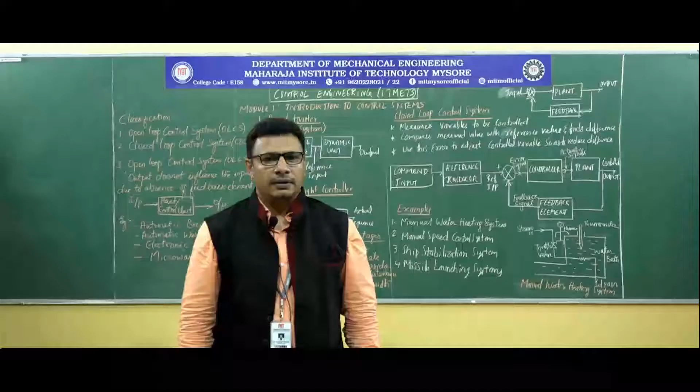In the previous session, we went through the overview of the subject as per the curriculum given by the university, that is Visvesvaraya Technological University, and we went on to know what are the possible outcomes the learner of this subject is going to attain, and along with that, we had an elaborate introduction to this particular subject. And then we went on to know the definition also.

If you can recall the definition for control engineering that I mentioned the other day, it was the arrangement of physical elements to direct, to regulate, to command itself and any other system in order to obtain the desired output. That is where we stopped the previous session. Now, the control systems can be of two major types. Either they could be manual control systems or they could be automatic control systems.

Now, in the manual control system, the job of controlling the performance or the functionality of the system elements is being taken care by a human. That is where we call it as manual control system. Whereas in an automatic control system, the human intelligence would have been transformed to some device which acts as good as a human intelligence to control the system. That means the human element will not be involved in controlling the functionality or the performance of the system. That is what is going to be the automatic control system.

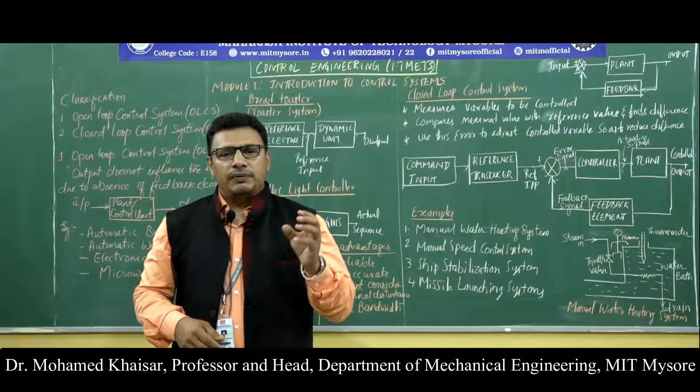So once the input is given to the system, that's it. It is the end of playing with the input. Then input gets processed by the dynamic unit or the various components of the system and we get the output. Whether we are getting the desirable output or not, that is of no relevance to the input. That means, by definition, the output of an open loop control system will not have any influence on the input of the system. That is what is illustrated.

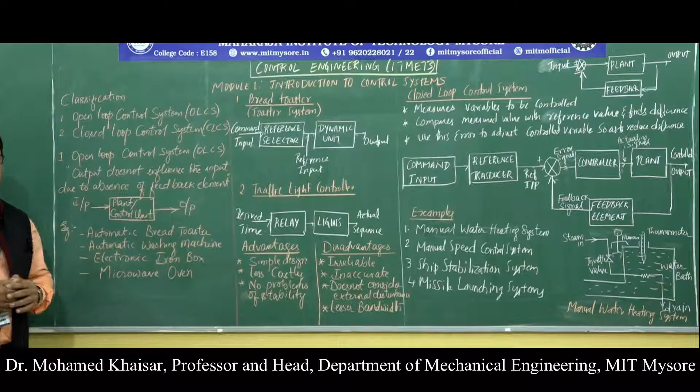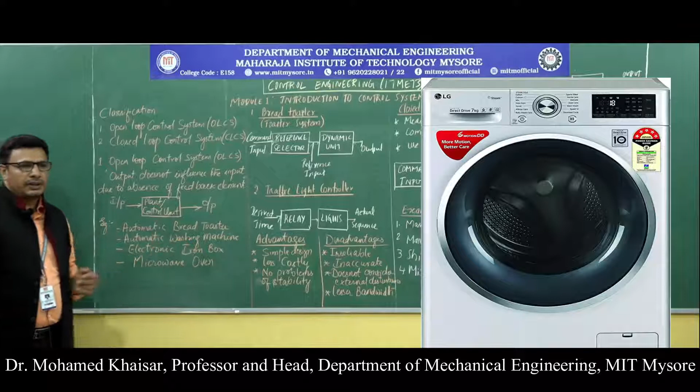Now, the most commonly used examples for open loop control systems are appliances most of us in our daily lives would have experienced, the list of appliances I have mentioned now. Automatic bread toaster, very commonly seen and used. Automatic washing machine, very commonly used. Electronic iron box, very commonly used as a household appliance.

Then microwave oven. In the modern lifestyle, all these appliances have become a need for all of us in society. Now, how do we say they are all open loop control systems? All of us have experienced the working of the bread toaster. If you haven't, let me just explain it to you. What do we do with the bread toaster? We toast the bread and eat. That is for a common man.

But let me think from the professional perspective, from the engineer's point of view. What do we do with the bread toaster? We keep the slices of bread in the toasting unit. Then what do we do? We switch on the electrical supply to the bread toaster. Then in the timer, we set the time, how long the toasting unit has to toast the bread, isn't it?

Then on what basis do we do it? On what basis do we do it? Because let me just tell you one reality. When do we call a bread to be a toasted bread? What is the desirable output from the bread toaster?

So by our own experience, what we tend to say is a bread toast is meant to be toasted when we find the desired degree of darkness on the bread toast. We try to visually measure the toasting of the bread by looking at the degree of darkness on it.

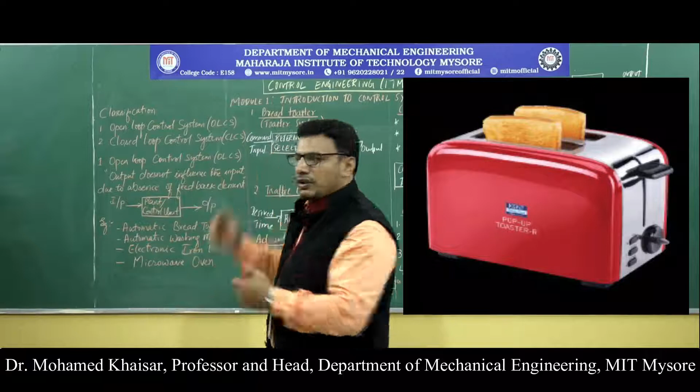Then the toasting unit is going to toast the bread and the result is the output. What is the output? The actual toasted bread. On the actually toasted bread, we are going to measure the degree of darkness. Now, let me just put the concepts of open loop control system here on the functionality of the bread toaster. Then from the toasting of the bread with the bread toaster, what all possible outcomes are there?

Number one, the bread, in spite of setting the calculated time for toasting, may remain under toasted. There may be a problem with the toasting unit, or you may have set insufficient time in the timer. Both are possible. Now, three possibilities are there as the output. One, the bread may remain under toasted. The bread may be amply toasted, as good as you want. You may find exactly the desired degree of darkness on the bread. Or it may also so happen that the bread may have got over toasted.

Now, if the bread is being toasted amply, as much as you want, then you will keep it happily and you will appreciate the working of the bread toaster. Now, you would have set the timer as recommended by the manufacturer, or as you have experienced on previous occasions. But in case the bread remains under toasted, does the degree of darkness get measured on its own, and does it tell the timer automatically to toast the bread for a little more duration? Does it happen? No.

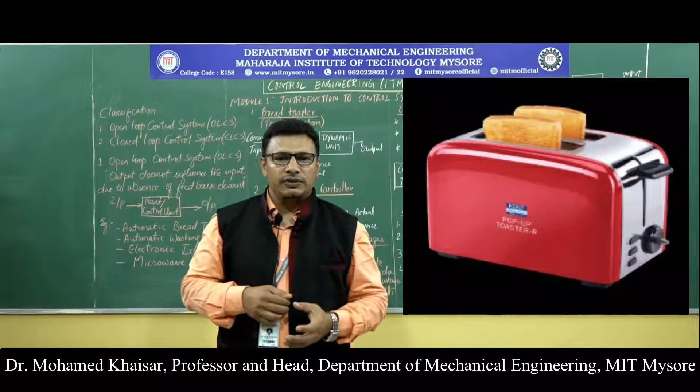Since there is no mechanism wherein the condition of the toasted bread is fed to the timer to alter the duration of toasting on its own, the bread toaster is not a closed loop control system, it is an open loop control system, because the loop gets closed only when there is an output measurement device and a feedback mechanism. Since there is no feedback mechanism, the bread toaster is a good example of an open loop control system.

Similarly, the automatic washing machine, on the same grounds as the bread toasting unit. Based on your experience or the manufacturer's recommendation, you would have said that for the clothes to get amply cleaned, if they are rinsed for so and so duration, you are going to get amply cleaned clothes. Then you set the time in the washing machine, for a calculated or estimated duration, right?

Then the timer sends the signal to the rinsing mechanism to rinse the clothes for so and so duration, and the rinsing mechanism starts rinsing. Exactly at the end of the set time, the clothes come out. Then all three possibilities are open: the clothes may remain under cleaned, they may be cleaned as per your willingness, or they may have been cleaned long back and are at the verge of tearing.

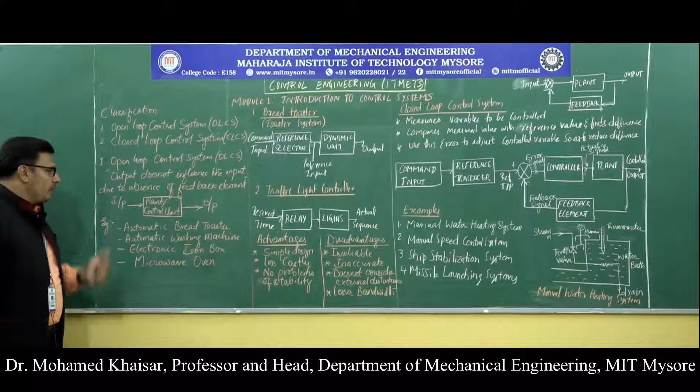There is no mechanism wherein it gets automatically corrected. That is why it is called open loop control system. Now, with all the examples that we have just now discussed, such as bread toaster or automatic washing machine or electronic iron box or oven, in all those cases, as well as many hundreds of examples around us, such as fan, light assembly or so.

What we tend to say is the output in any of such systems does not influence the input. Why? Because of the absence of feedback element in the system. Now, what are the advantages? Since there is no output measurement device, there is no feedback element, there is no error detection happening, it has got a few advantages. The design is simple, because of fewer moving elements and fewer components. Then it is less costly.

Obviously, once the number of elements comes down, when the feedback element is eliminated, when there is no measuring device of the output, then it is going to cost us less. Then, since there is no feedback, the components of the open loop control system will not have stability issues.

Why? Because if in every single cycle the output is being measured and fed back to the error detector, and error is getting detected and then compensated, then every time you check the performance of the system, the output will not be stable. Because in the next cycle there will be something else as the output, since error detection and correction is happening continuously in the other type, the closed loop control system.

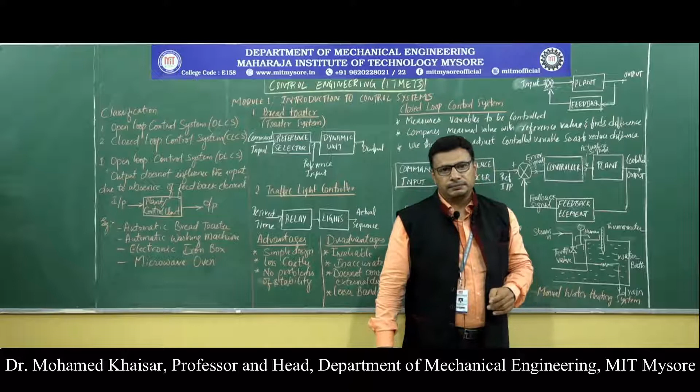Now once you get the output, this output is measured and it is being fed back to the controller again. What does it mean? In the open loop control system, there was no measurement of output. In the open loop control system, there was no feeding back of the output. Whereas here, there is an output measurement system, there is a feedback mechanism.

So feedback is going to be given to the controller, wherein the actual output that you have got after the input has been processed will be compared with the desirable input, and once both of them are compared, you will get the error. Based on that error, whatever correction has to happen, the corrective signals are passed to the plant, and the plant is going to process according to the corrected input, and then the output will be the desired output.

Why you are able to get the desirable output in every single cycle is because in every single cycle, the output from the plant is measured and fed back using the feedback element to the controller unit. The controller is going to compare the actual output and the desirable output, and whatever is the error, it is fed to the plant again. The correction signal fed to the plant is processed accordingly, and at the end you will get the desired output. It is rather called controlled output.

Now that is what has been written here. So the definition of closed loop control system says it is a control system wherein the output influences the input due to the presence of a feedback element. That is what has been explained in terms of points here.

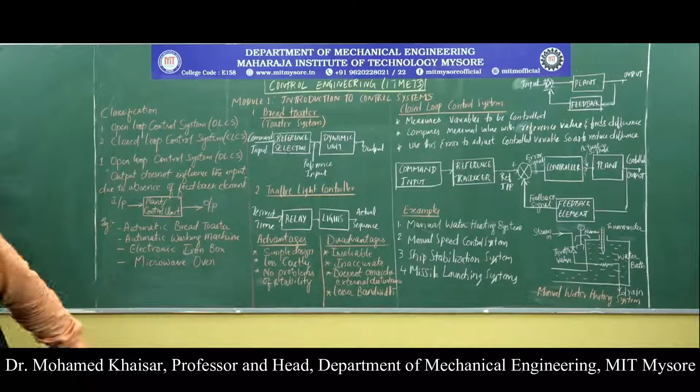Now if we try to illustrate it with a simple block diagram, see, this is the command input, what is actually desired, and since the system does not understand what we are desiring from it, it will have its own means. The machine understands its own way. So the command input is fed to the reference transducer, which gives it in the way the machine understands what it has to do.

This is passed on to the controller unit, and the controller will pass on the signal. The controller asks the plant to process the input, and at the end we are going to get the output. This output is measured and fed back with the feedback element, and the feedback signal is fed to the controller or error detector.

Here the comparison of actual output and desirable output is made, and whatever error comes out after comparison is being compensated. The controller is going to calculate the corrective action that has to be taken, and that acts as the actuating signal. That is what is fed to the plant, and thereby we will get the controlled output. Every single cycle this repeats.

We will be giving the command input to the reference transducer. The reference transducer takes up the command input and converts it, just like here, the desired degree of darkness was what was wanted from the bread toaster. The time set in the timer was the reference signal that the machine understands in terms of input.

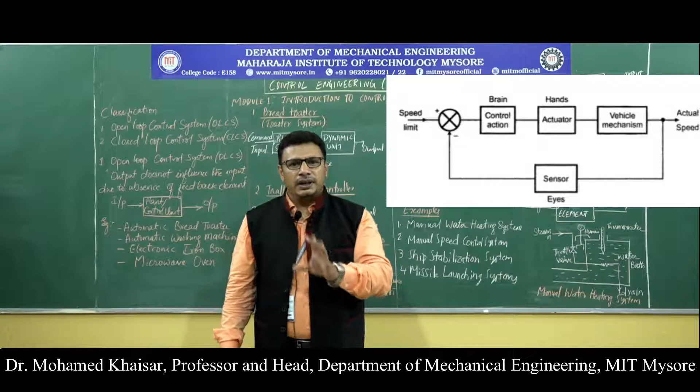If the vehicle has exceeded 80 kilometers per hour, then again our eyes will look at the speedometer and send the output signal to the brain. Brain calculates, I was supposed to move at 80 kilometers per hour, I am moving at 100 kilometers per hour, then it sends the corrective actions to the leg so that it will start decelerating, and the speed could be brought to the 80 kilometers per hour mark. So that is how manual speed control system works.

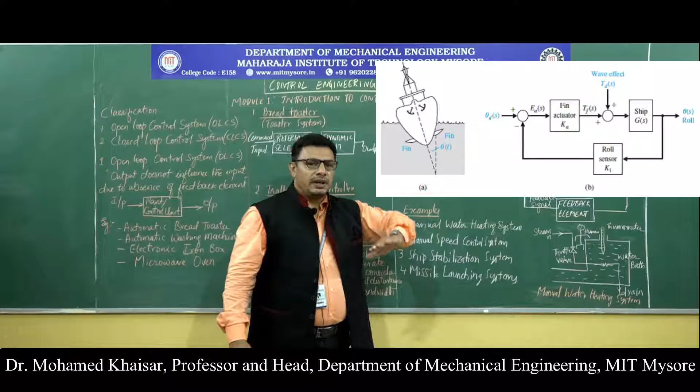Or it can even be ship stabilization system. As you know, there will be a lot of roll with the ship when it moves in the ocean or seas, so obviously it has to be stabilized every single moment. So that is ship stabilization system.

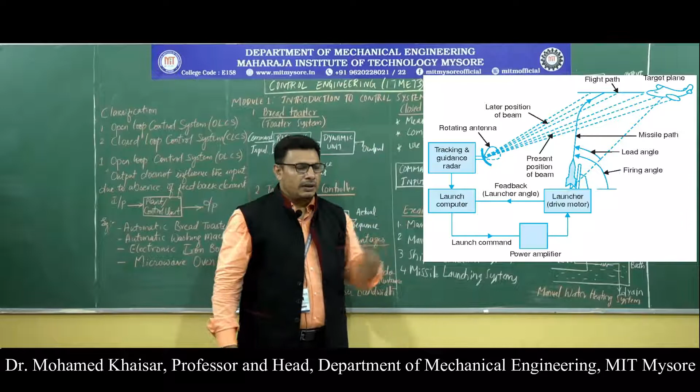And even in missile launching system, if an aircraft from enemy territory is flying into our land, the radar is going to track the path and speed of the moving enemy aircraft, and then it calculates the angle at which the missile has to be launched, so that the timing of the missile and the enemy aircraft could be mapped with one another, and we could strike the enemy aircraft before it starts damaging our territory. Those are the examples of the closed loop control system.

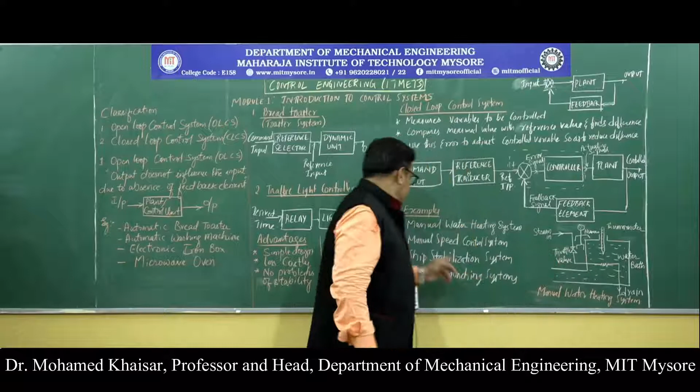I'll just illustrate the manual water heating system here. This is the pictorial representation of manual water heating system. This is the water sump or water bath, and this is the steam pipeline through which the steam is flowing through the water bath. Now, it has got a control valve, the throttle valve. There is a thermometer to measure the temperature, and since it's a manual water heating system, a human being is involved who will be continuously observing the thermometer.

Now, what happens is we switch on the steam flow into the water bath. We switch on and then we open the valve over here. Then the hot steam starts flowing through the water bath.

Then when it passes through the water bath, due to the convection heat transfer, it gives away the heat to the water and the water starts getting heated. And the person standing over here will be continuously observing the thermometer. As the water gets continuously heated, the temperature of the water starts rising, and that results in a rise in the mercury level of the thermometer. This is being observed by the human being.

Now, suppose we want the water to get heated to say about 150 degrees centigrade, or say it is beyond the boiling temperature at 1 atmospheric pressure. Let me say we want the water to get heated up to about 80 degrees centigrade. Then we start the steam flow by opening the throttle valve, the steam passes through the water bath, and the moment it reaches 80 degrees centigrade, let the steam flow be discontinued.

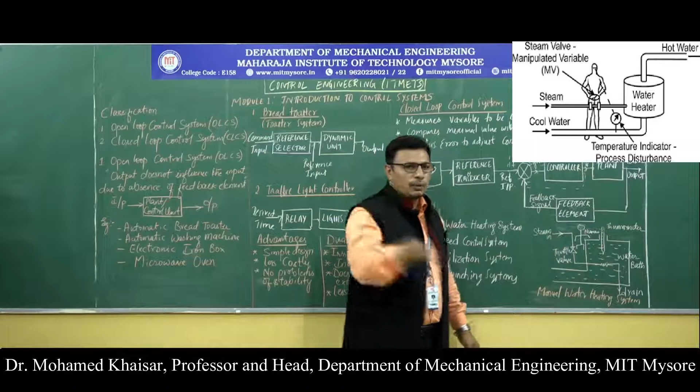Input is the steam, the dynamic unit is where the heat is being transferred to water through the steam pipe. Then output is the temperature of water. This is being measured by the output measuring device, the feedback element is the thermometer, and the observer, the human being, is acting as the controller over here. Because of this the loop is closed, and this sets the simplest of closed loop control system examples.

So with that we will be winding up this session today. What we have learned today is the control system classification. It is of two types: one is open loop control system, and the second one is closed loop control system. Open loop control system is defined as a system where the output has no influence whatsoever on the input, because of the absence of a feedback element. The simplest examples are the bread toaster, automatic washing machine, electronic iron box, or even microwave oven.

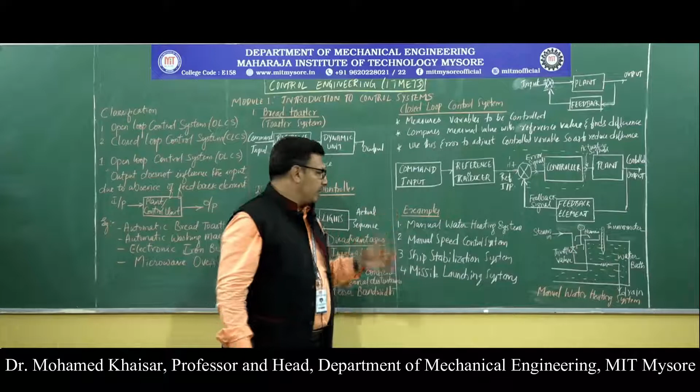Then the block diagram illustration has also been shown, and the advantages and disadvantages of open loop control system have also been discussed, and then we went on to know what this closed loop control system is all about, how it functions, and we took the example of a manual water heating system so that the closed loop control system working could be illustrated.